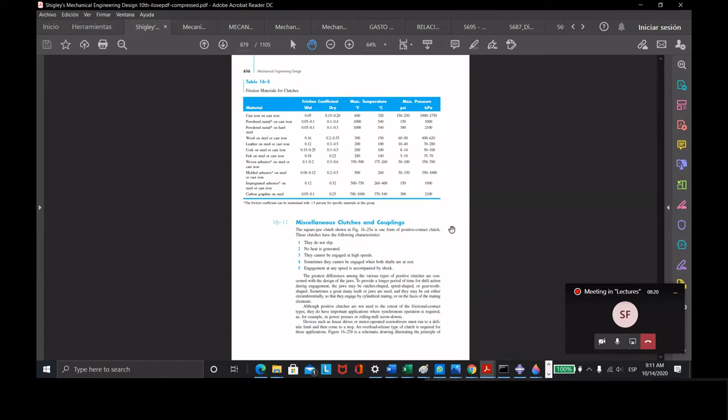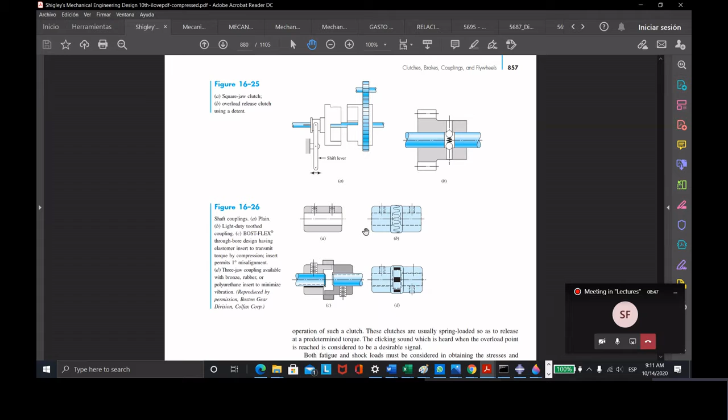So there's information about couplings here in 16.11. There's actually this figure where some types of couplings are shown. This chapter also provides information about clutches, but we will focus only on couplings for the moment. So this figure provides a few examples of different types of couplings.

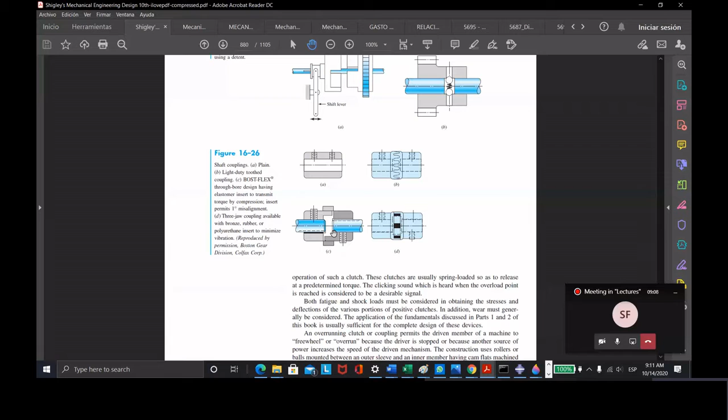So for instance, this one that is a plain coupling, this other that says that it is a light-duty toothed coupling, or this other, letter C, that provides the commercial name, BOST-FLEX, for this type of coupling. This other, letter D, says that it is with three jaws. But these are only a few examples.

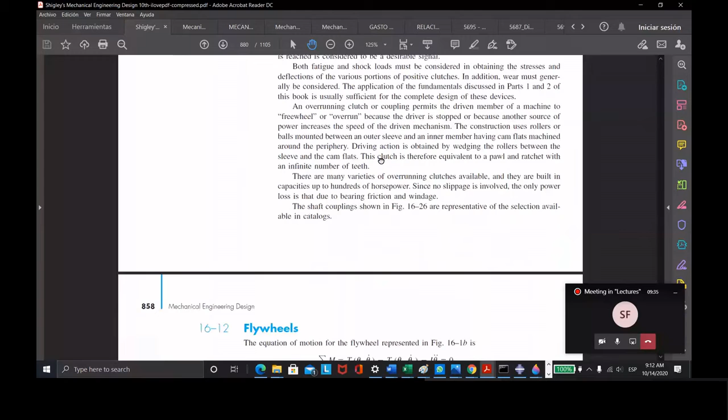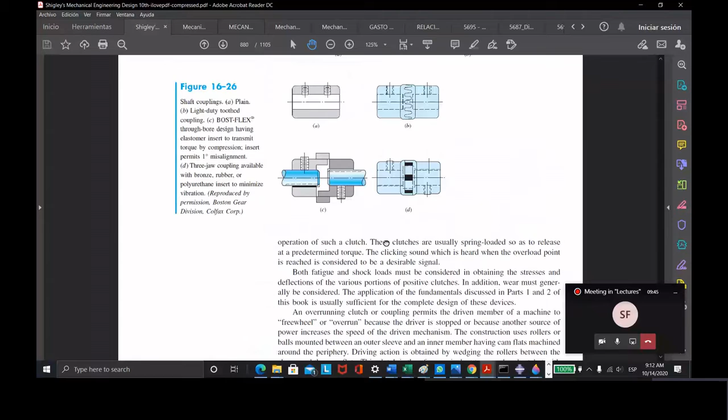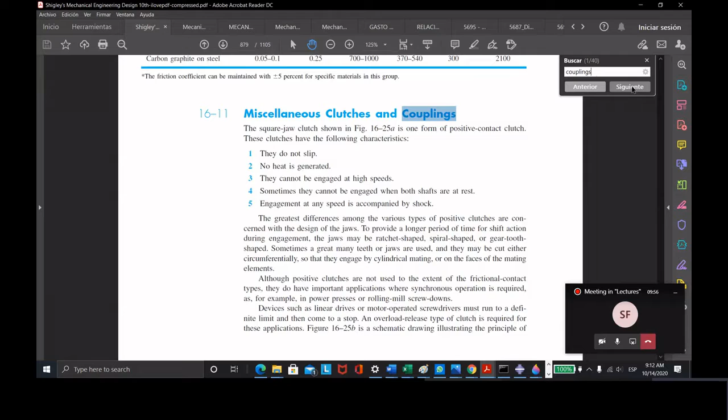There are several more. And essentially, the information provided for couplings is quite limited in the Shigley, because then it goes to flywheels. So essentially, it's just a small section here. Let me search couplings, Control L. Yeah, so essentially, there's almost no information about couplings in the Shigley.

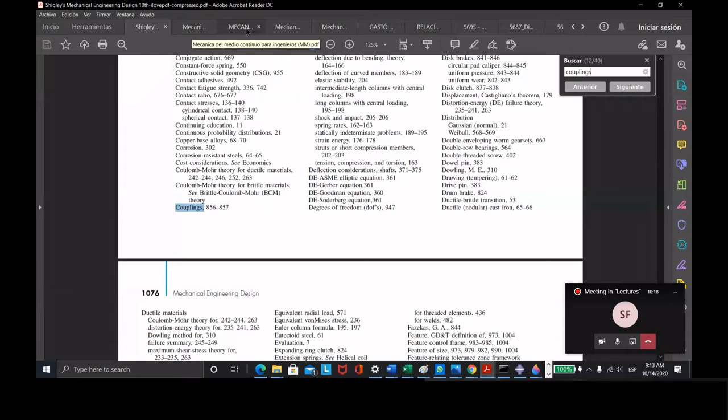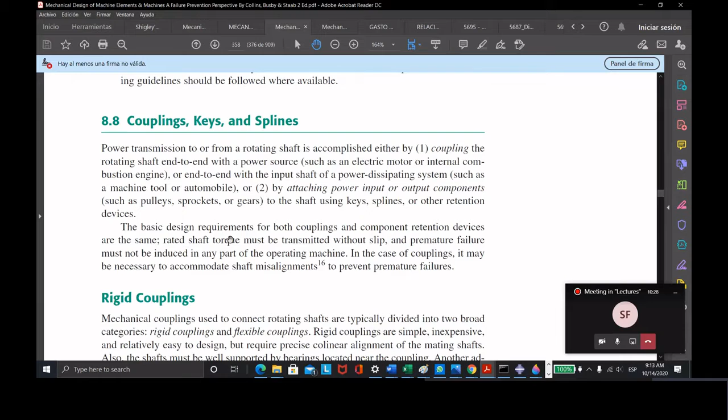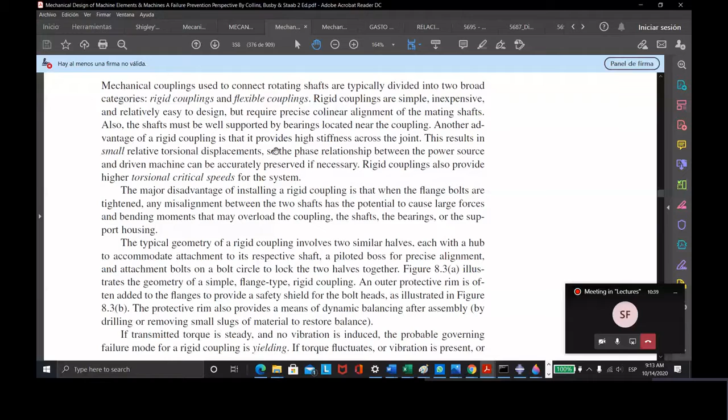So I will go to the other book, the one from Collins. And in the one from Collins, there's a little bit more information. It's in chapter 8, section 8.8. So there are two types of couplings, rigid and flexible, and each one has cons and pros. But here are more examples of couplings. In this case, rigid couplings.

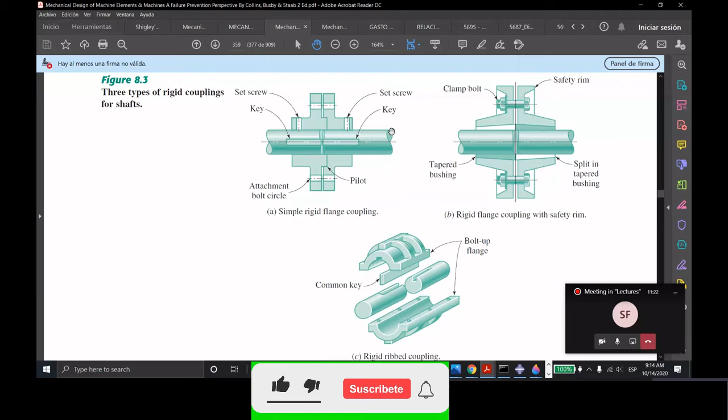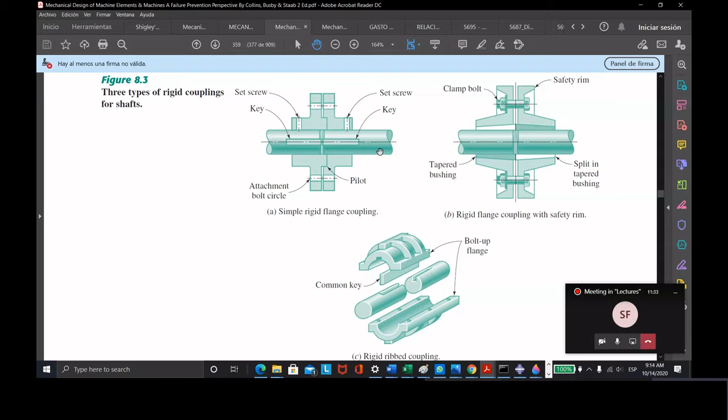So the purpose essentially is to make the connection between one shaft and a second shaft, right? So the input power is transmitted to the other shaft. If the input power is in the left shaft, then it is transmitted to the right, or vice versa, right? So we have different types of rigid couplings. This one that is with only a flange.

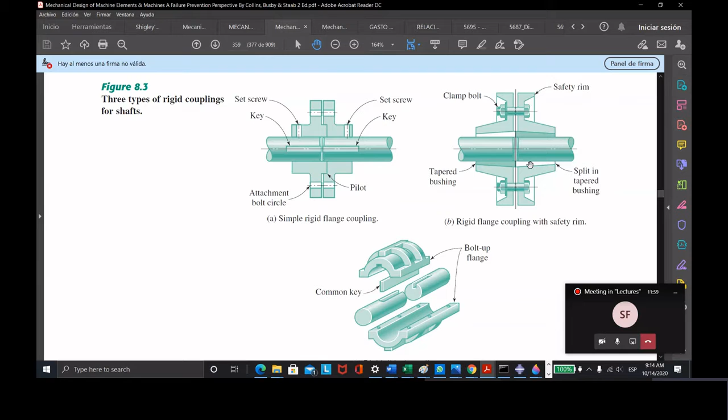This other is also a flange, but it says that it has a safety rim and provides a tag where the safety rim is. So essentially this one is also a flange, right? Or this other that says that it's a coupling with these ribs. So it's a rigid ribbed coupling.

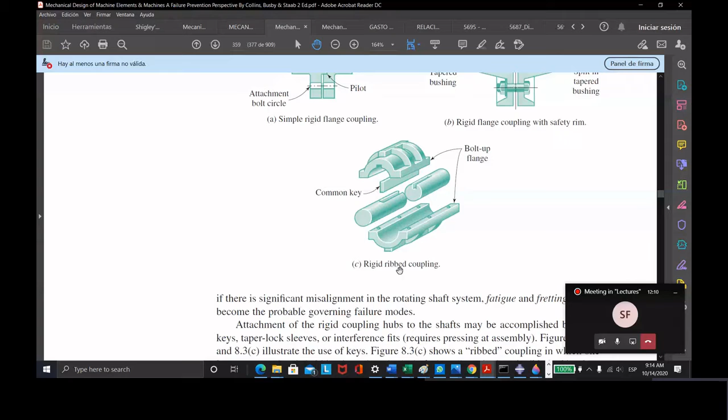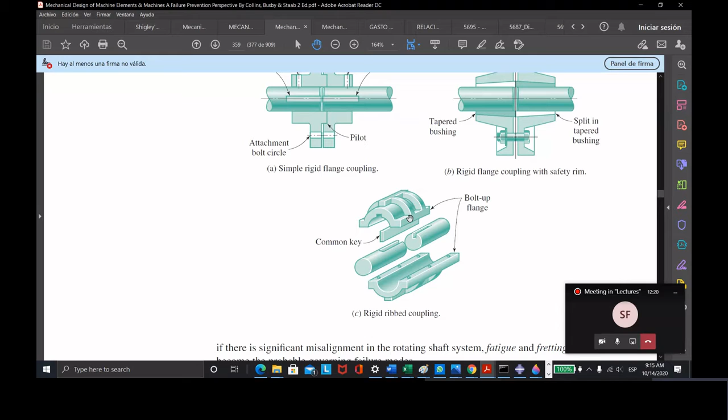So these are some types of rigid couplings. One of the disadvantages of rigid couplings is that you need to have a precise alignment between the shafts. So essentially, the left shaft has its center line, and the right shaft also has its center line. So in using these rigid couplings, it's necessary that the alignment of the shafts be as precise as possible.

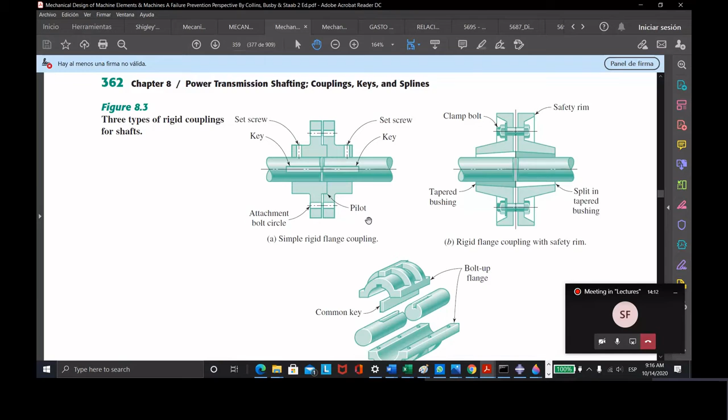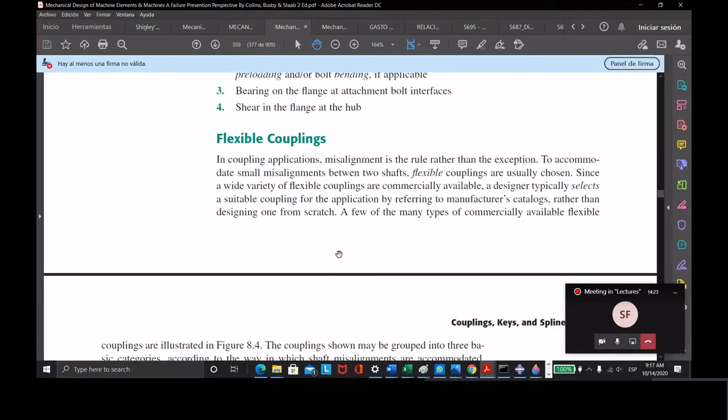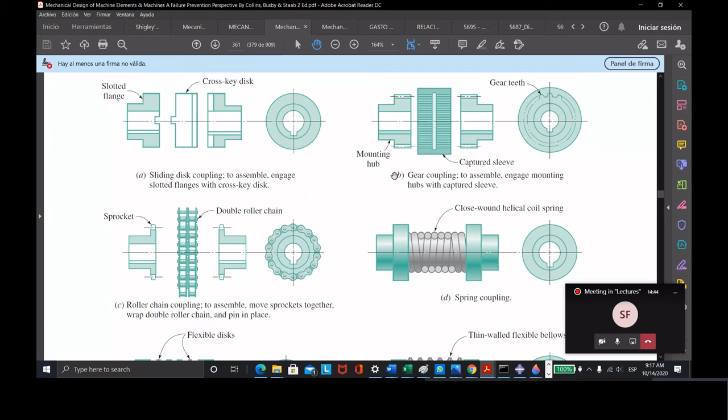And we have flexible couplings. So with flexible couplings, the advantage is that they can absorb these misalignments. So some examples of these flexible couplings are this sliding disc coupling, this other that says it is a gear coupling, this other that is with a roller chain, or this other that says it uses a coil spring, or this other that says flexible disc couplings,

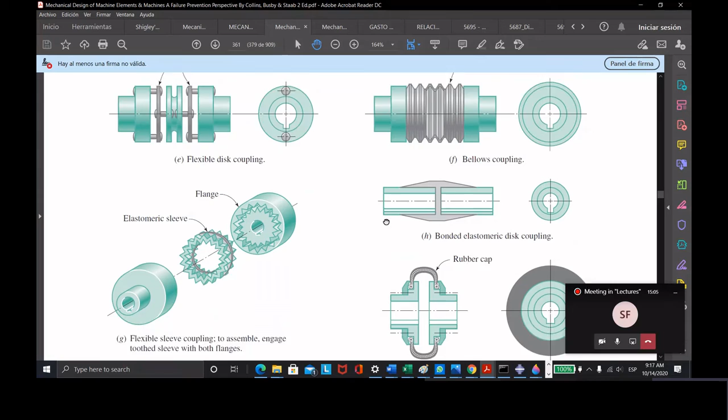this other bellows coupling, flexible sleeve, or this other that is a rubber cap. So most of these flexible couplings use some type of mechanism so the misalignment can be absorbed, and in these mechanisms it's normal to use different types of rubbers or elastomers.

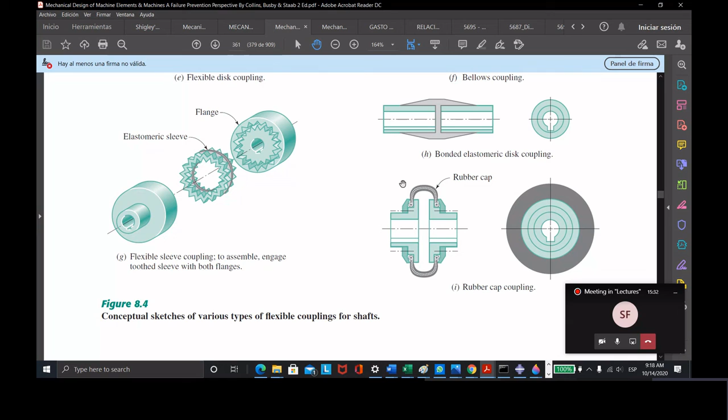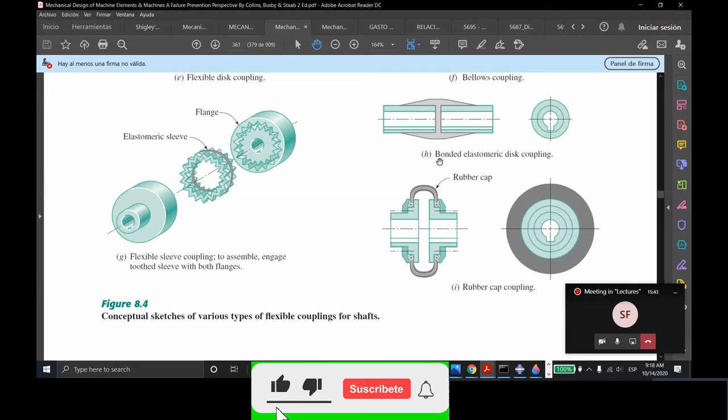But there's more information here in the book. So